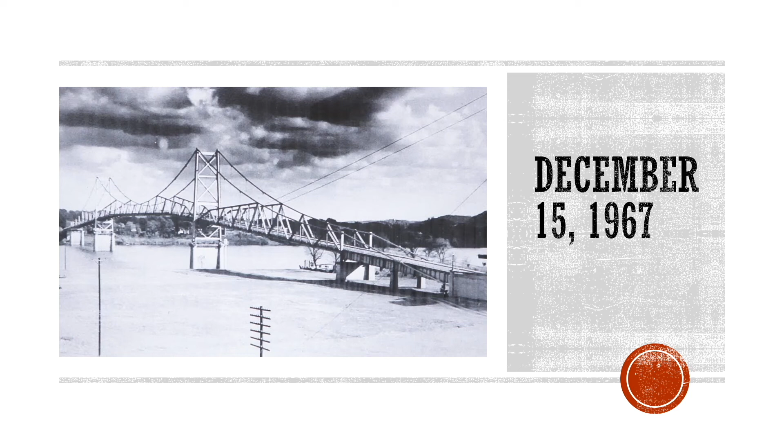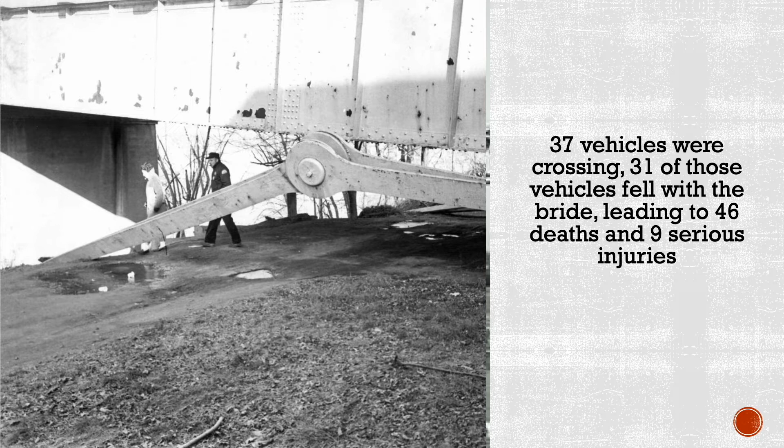On December 15, 1967, the Silver Bridge collapsed into the Ohio River under the weight of the rush hour traffic at around 5 p.m. At the time, 37 vehicles were crossing, and 31 of those vehicles fell with the bridge, leading to deaths of 46 people and 9 serious injuries.

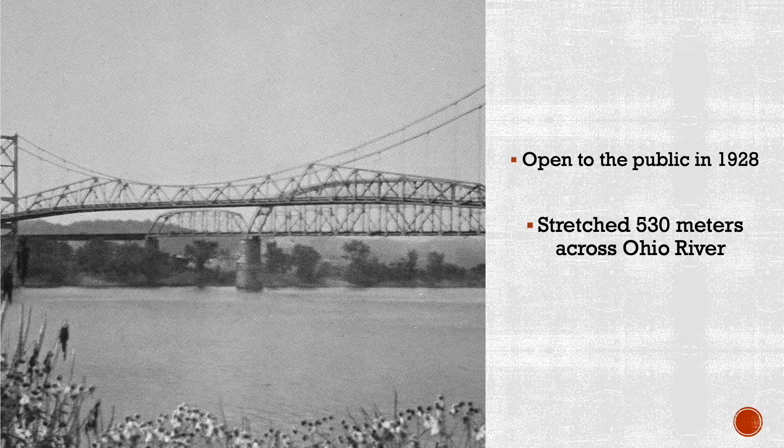The bridge first became open to the public in 1928. It was named after its aluminum paint and unique silver structure. It stretched 530 meters across the river. Unlike the standard chain-link suspension bridges at the time, the Silver Bridge was created with an eye-bar design where the cables were anchored to stiff metal rods.

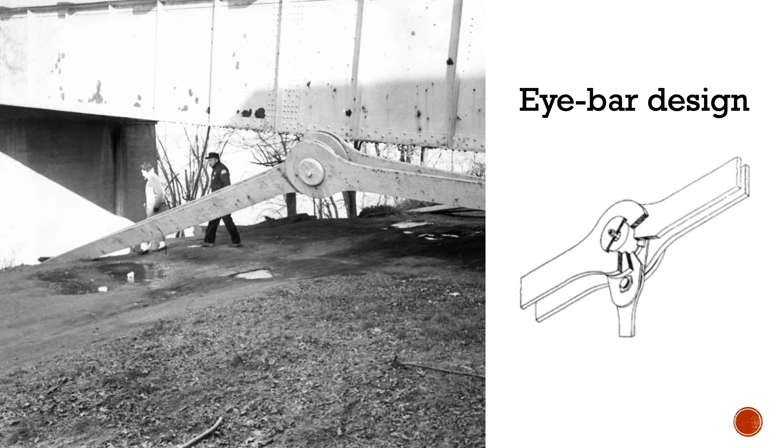An eye-bar suspension bridge had never been built before in the United States, so there were uncertainties about how much weight the bridge could hold. The architects claimed that they were using heat-treated carbon steel, which is supposedly the strongest steel ever made. For 39 years, the bridge served its function.

Then on the 15th of December in 1967, there was a loud noise and the bridge instantly folded in on itself. There was a defect in one of the eye-bar links below the north tower, so the chain detached and the entire support eventually broke. The whole bridge collapsed in under a minute.

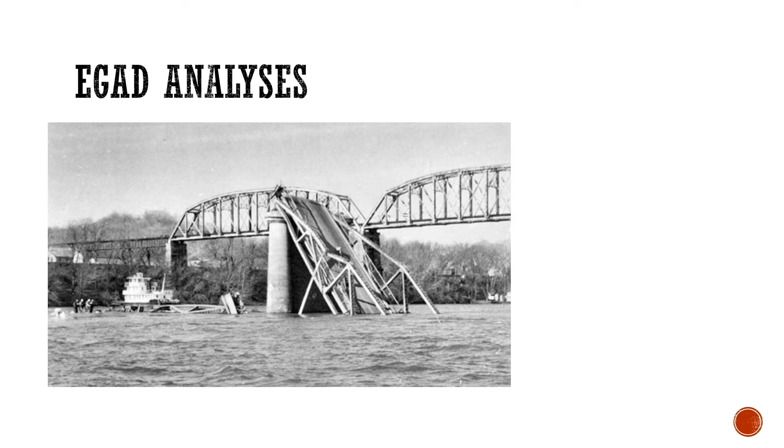The collapse of the Silver Bridge was a major disaster indeed, but the intentions of the civil engineers and architects were not ethically incorrect. In the Code of Ethics, section 77.2i says, "A practitioner shall regard the practitioner's duty to public welfare as paramount." Judging from this code alone, the engineers failed to uphold this Code of Ethics and performed an injustice to the public, resulting in the death of 46 civilians.

Some alternatives the engineers could have taken would be to have used a more commonly known material, one that can be inspected easily and easily detected of any unsafe precautions. A more stable and safer material would have prevented any possibilities of unknown sources of error that could arise in the bridge and would have saved the lives of many innocent civilians.

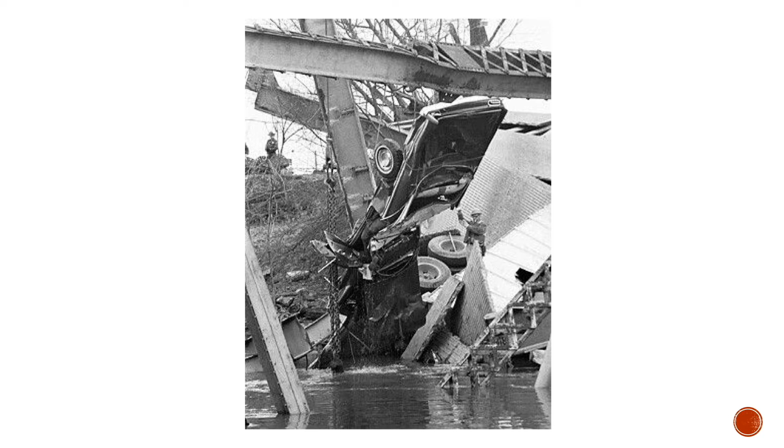Section 77.2i states, "A practitioner shall regard the practitioner's duty to public welfare as paramount." Choosing a safer material would have abided by this code of ethics and would have resulted in less ethical issues. Each of these actions would result in no violation or breaches of Code 77 or 72, which is what we are looking for. With the alternative actions put in place, they would follow both Code 72 and 77 without breach, and would have allowed for ethically and morally correct decisions to be made when constructing the bridge.

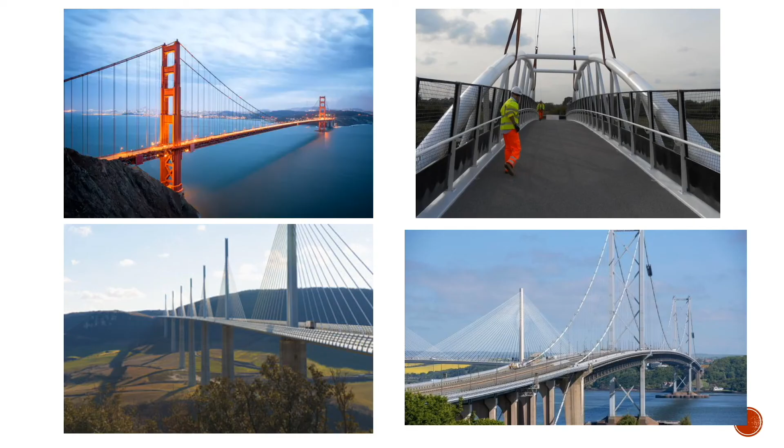It is argued that the failure and collapse of the Silver Bridge was impossible to see coming without thorough inspection. The correct path to prevent such a horrible disaster and the steps needed to be taken would have been to have the bridge thoroughly inspected in frequent periods over time in order to ensure the safety of the bridge and to that of the public.

Engineers today are much more knowledgeable about these things that can cause failures such as corrosion fatigue and stress corrosion that occurred to the Silver Bridge. These are vital steps that engineers have grown from in order to succeed on the right path and implement safer and better technology within bridges of the present. The technology of today allows for safer and better bridges to be constructed in our societies so that we would not ever have to see another Silver Bridge disaster ever again.

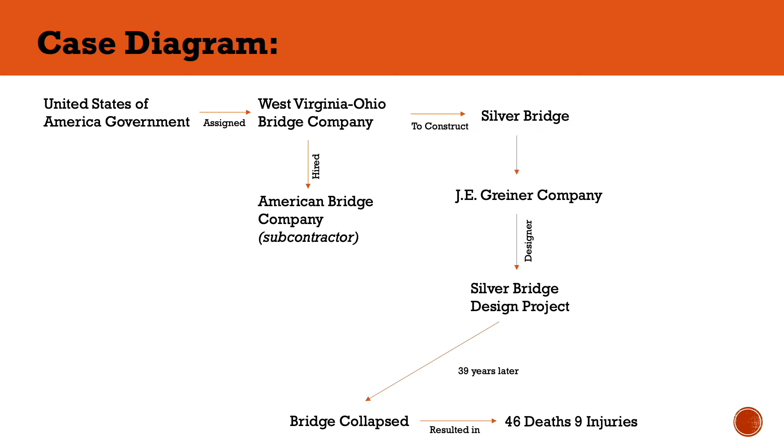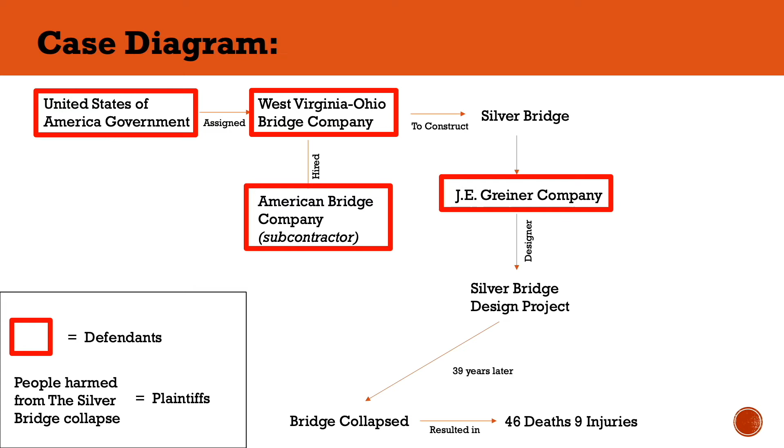The Silver Bridge was designed by J.E. Greiner Company and built by West Virginia Ohio Bridge Company along with subcontractor American Bridge Company. Hence, these three companies, along with the U.S. government, who assigned the bridge company to construct the bridge, are the defendants of this legal case. The plaintiffs are all the people affected from the collapse of the bridge, whether it be through injury or property damage. For this reason, tort law analysis is applicable here rather than contract law.

J.E. Greiner Company does in fact satisfy the three terms for proving tort. They were responsible for the designing of the bridge and provided two alternatives in place of the wire cable design of the bridge, one of which included the eyebars, which were critical in the failure of the bridge. They had a duty to serve the people using the bridge and had faults in their plans. West Virginia Ohio Bridge Company and American Bridge Company simply complied with the plans, and it is reasonable to assume that the changes were appropriate, and hence, the second criteria is not fulfilled.

The U.S. government consisted of many qualified engineers and officials. However, the district engineer ended up approving the revised plans provided by J.E. Greiner for completion, and approved the final structure once erected. This was in fact unlawful from the district engineer, as he did not notify other government officials and board members of such changes. Therefore, through vicarious liability, the U.S. government as a whole satisfies all three principles for tort.

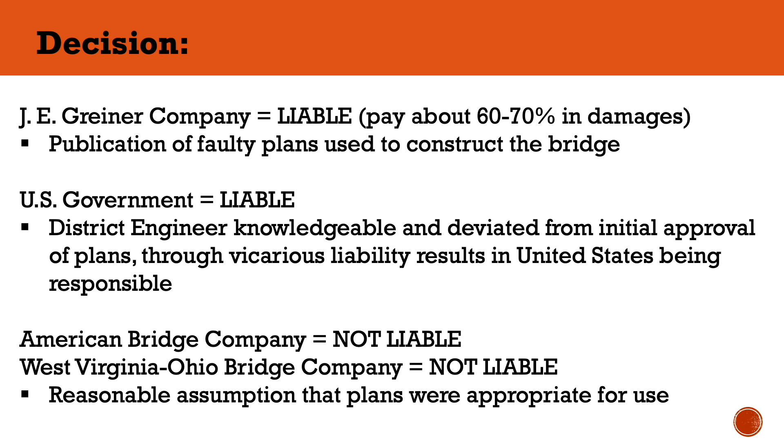As a result, both the U.S. government and J.E. Greiner Company are liable for the collapse of the bridge in 1967, with the latter likely owing approximately 60 to 70% of all damages to those affected in the collapse via the concurrent tortfeasors concept. They were responsible for the designs and were entrusted with their engineering knowledge to create appropriate plans.

In conclusion, the collapse of the Silver Bridge was an avoidable yet valuable moment in history. The event allowed for more frequent and in-depth bridge inspections, as well as more knowledgeable engineers aware of corrosions and stresses in future bridge designs.